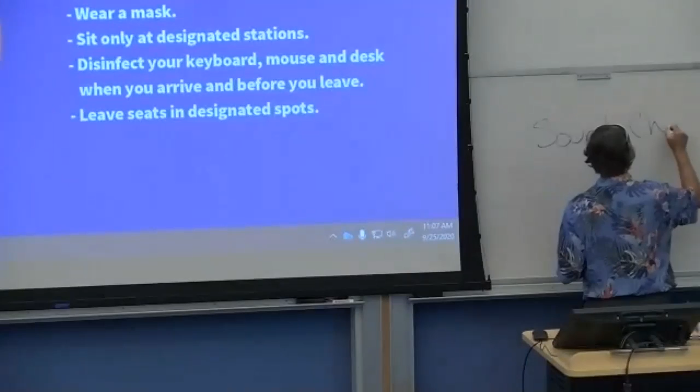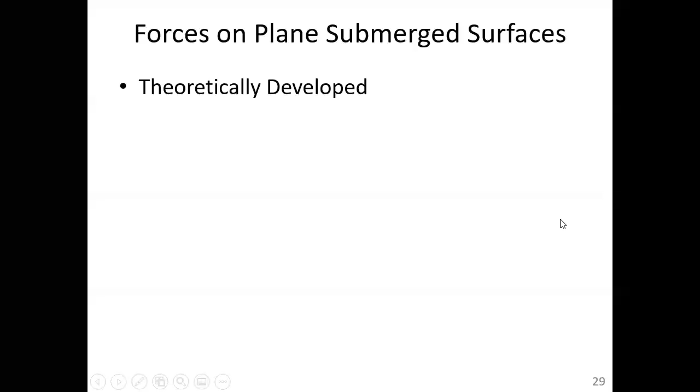So we were talking about forces on plane submerged surfaces. This thing is always in the way. And so we theoretically developed the force on a plane submerged surface. That's pretty straightforward now, and really, after all the differential calculus we did, that's a pretty simple result to do.

All you need to do is find out where the center of area is for your object. Once you know that, you need to find the pressure at that location, multiplied by the area, for the magnitude of force. The more challenging one is figuring out where the force acts. And again, for that, because we're working in X, which is a horizontal surface on a free surface, and Y, which is an inclined axis, since we're working in that plane, we need to have a coordinate XCP, YCP to locate where this force is acting.

And so the force along the y-axis is a fairly straightforward equation. YCP, which is the location from the free surface to the center of pressure, is a sum of the distance along the y-axis to the center of area, plus some term that's a function of two properties of the area, the moment of inertia of the centroid and the area itself. And then the last term is the depth of submergence of the center of area.

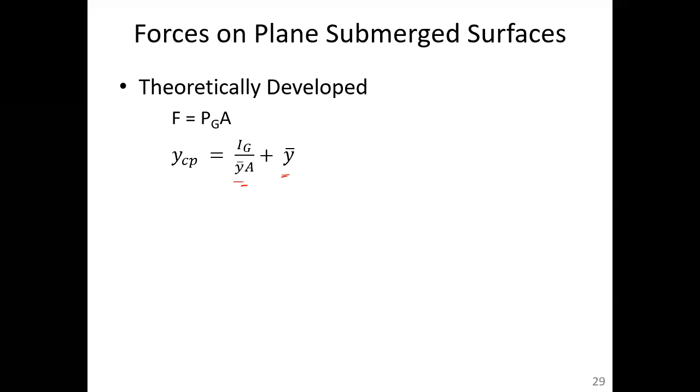And again, in that first term, IG over Y-bar A, the only thing that really changes on a surface is the depth of submergence. So physically what it's saying is, as the depth of submergence of your area gets deeper and deeper, its Y-bar gets larger and larger, the center of pressure is moving towards the center of area.

And then the other direction, if we have a figure through which we can put a y-axis, which happens to be an axis of symmetry, then we know that the center of pressure dimension X will be right along that axis of symmetry. So typically, for example, for a rectangle or a circle, where the axis of symmetry is right down through the center of area in either of these cases, the force is going to act directly below the center of area, YCP. So that's everything we developed.

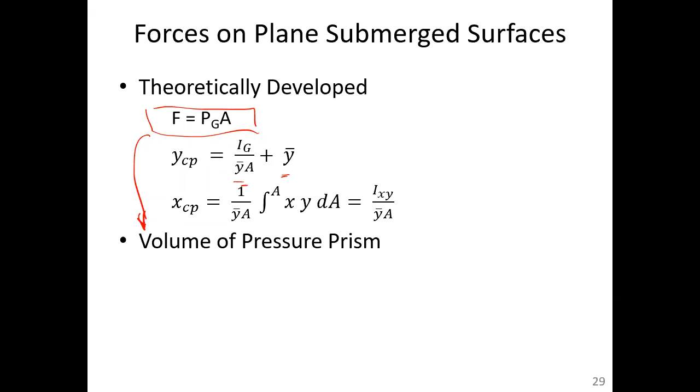And the last thing I might identify is, and I'll show this on another slide, this equation, force equals PGA, is basically another concept. It's just the volume of the pressure prism that sits on the surface. So I'll sketch that on another slide.

And as such, this prism, which is a linearly changing pressure as you move over the surface, the force is going to act through the centroid of the pressure prism, which is XCP and YCP. It's not saying anything different, it's just another way of looking at it.

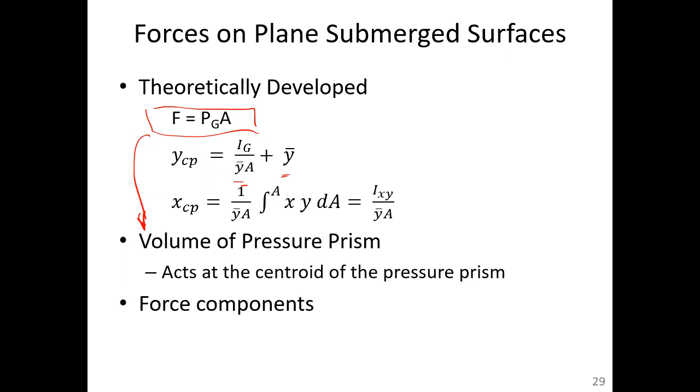And another thing I want to get into today is force components. So obviously, we can put everything into a vertical and horizontal plane, even though we have this inclined surface. That's what I'm going to talk about.

So at the very end of the last class, one thing I stressed is we're going to have these surfaces. We looked first at a vertical bulkhead gate, and first we said it was rails that were holding it in place. The force of the fluid, F, on the surface has to be offset by the resisting forces of the rails on that fluid force. The rails would maybe split that force, so each rail would be applying half of that force, such that the sum of the forces in this horizontal direction are zero.

You could also just hold the gate at the bottom. In this case, I'm pushing in this direction, and I not only have a moment at the bottom, but you need to also have a force resisting the force. This is a static equilibrium system, so it must subscribe to force equilibrium and moment equilibrium. Both of those say that either the sum of the forces in any direction is zero, and the sum of the moments at any point in space is zero. Thinking about just this system, the sum of the moments is zero.

They can't hear me? They said it's fuzzy, it's buzzing. Let's see if I change this. Does that help at all? Does that make the sound any better? How about that, is that any better? Let me know by chat. They said yeah, yes, it's better.

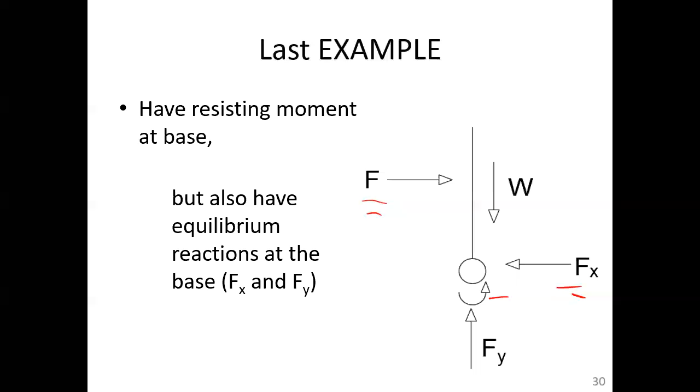So I want to do another example, kind of similar to the example we did last time. Before we had a vertical gate, now we're going to look at an inclined gate. And we're going to ask a lot of different questions, but also expand this into components. So what we're going to have is a system where...

From the free surface down to the top of this 8-foot by 6-foot gate, we have 18 feet along the y-axis. And again, if you want to convert any distance L along the y-axis to either a vertical or a horizontal distance, I've given you those equations. For example, H is equal to L sine theta, which just means that L is equal to H over sine theta. So for example, if we have 18 feet along the inclined axis, the 9 feet is the 18 feet times sine of 30 degrees. Sine of 30 is 0.5, 18 times 0.5 is 9.

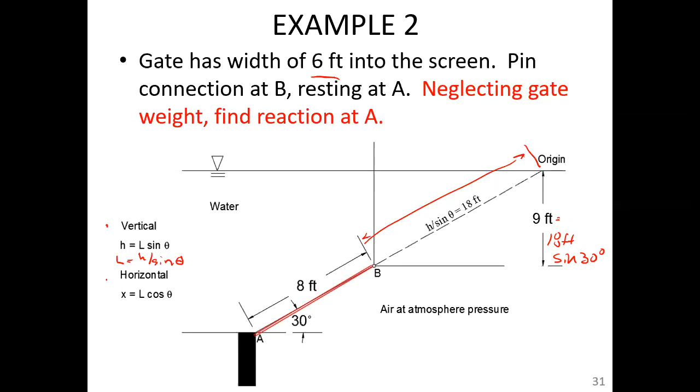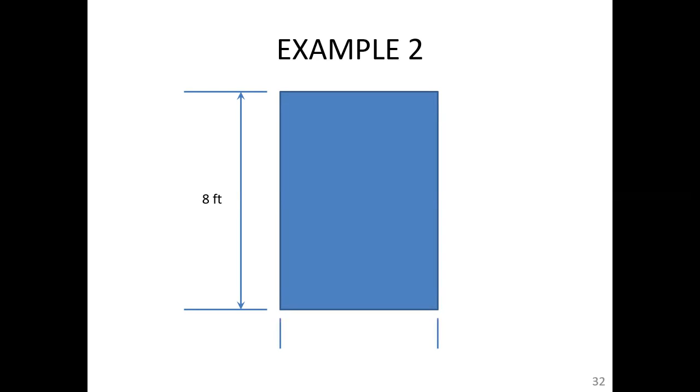So again, we can convert any distance between the h-axis, which is vertical, and the y-axis, which is inclined. And if this is our surface, so all I did was highlight it in red, that's our surface, this is what it looks like. This is the next slide. So again, what this surface looks like, when you look down right on it, it's 8 feet along the inclined axis, it's 6 feet into and out of the board, and it has a center of area, as you would expect, right in the center.

So either go, oops, I can go back, either go 3 feet from either side, or 4 feet from the top.

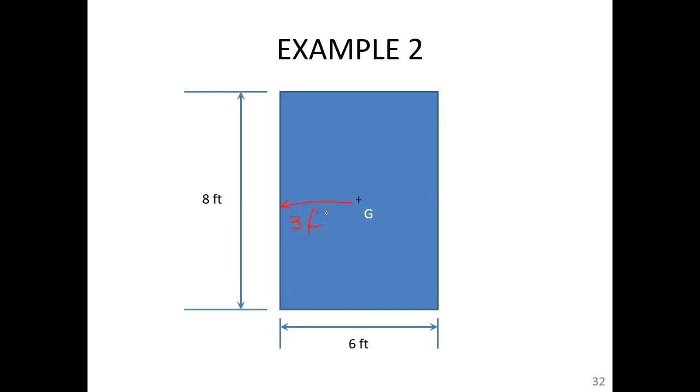So again, that's what the gate looks like. What we're trying to do: if the top of this gate along the y-axis is 18 feet along the y-axis to the free surface, or 9 feet vertically to the free surface, we could calculate the pressure at the very top, and again the pressure at the very bottom.

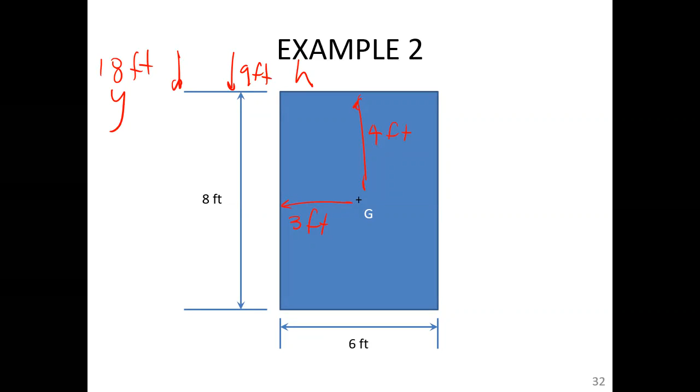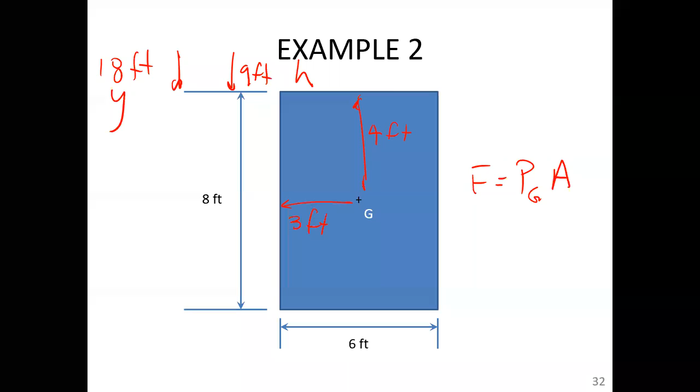But more importantly, remember, all we need to do is calculate the pressure at the center of area. And we know where the center of area is.

And that will give us our force. So this is a plane submerged surface, the gate, with fluid on one side of the surface, which is really common. There are problems, either I'll throw at you or the FE exam will throw at you, where you have different levels of water on each side.

And you just break it into looking at the left side, looking at the right side. The gate and the fluid are static. These are static equilibrium problems, so fluid statics applies. Once we move into fluids moving, fluid statics does not necessarily apply anymore. Sum of the forces is not zero; sum of the forces is mass times acceleration.

That's when we get into momentum in this course. Many of your design problems will be static equilibrium forces. That's why I'm spending all this time. So here are our fluid statics equations.

And again, sum of the forces in any direction for this will be zero. Sum of the moments in any direction are going to be zero, and those moments can be taken anywhere in space. Your real challenge is calculating the moment arm to the point in space you selected.

And again, the wisest thing you can do is always pick a point where one or more forces are acting first, because then their moment arms are zero. They just fall out of the equation. That's really the key to running equilibrium.

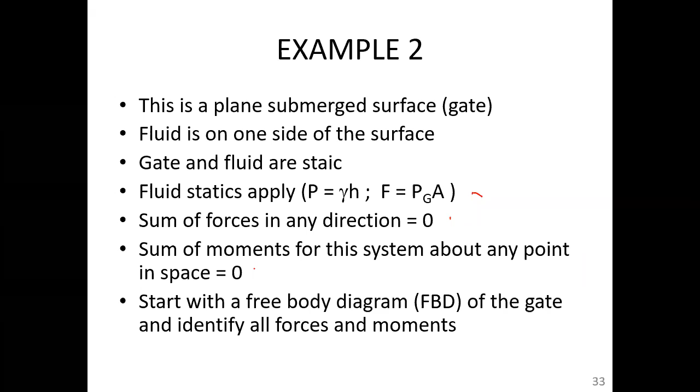So, as I've instructed you before, and I'm doing it again here, when you have a problem given to you like this, the best thing to do is start off with a free body diagram. That really helps you visualize and set up the force or moment equilibrium equations. So in this case, here's the gate between A and B.

And remember, what this problem is after is the reaction force at A. This gate is just resting at A, and there is a reaction force at A. The pressure distribution on one side is what's driving this reaction at A.

However, if this gate had a weight, that would also be complicated. So again, in this problem, you're to assume the gate has no weight. But in many problems, you will see that the gate has weight, and that just is one more force or one more moment you have to deal with.

Recognize that: most problems will either tell you the gate is weightless, or they ignore it, or they will give you the weight of the gate. And typically, if it's a uniform material, that weight is going to act through the center of area of the gate. If it's a non-uniform material, you got to figure out where that weight comes from.

So this is our free body diagram, and we can certainly look at this problem. So we have a pin connection at B.

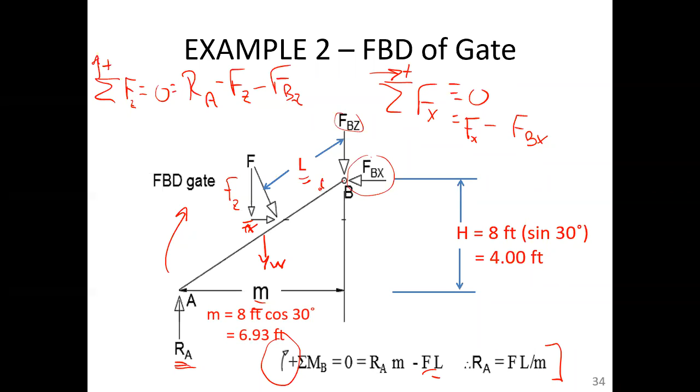So, again, we know that the vertical height of this gate from the inclined axis, its total length is 8 feet, but in the vertical, it would be 4 feet. And likewise, M is going to be 8 foot cosine 30. So remember, this surface is inclined at 30 degrees off the horizontal. So that's where we got that from. That was from the definition that we had in the original slide. This surface is inclined 30 degrees.

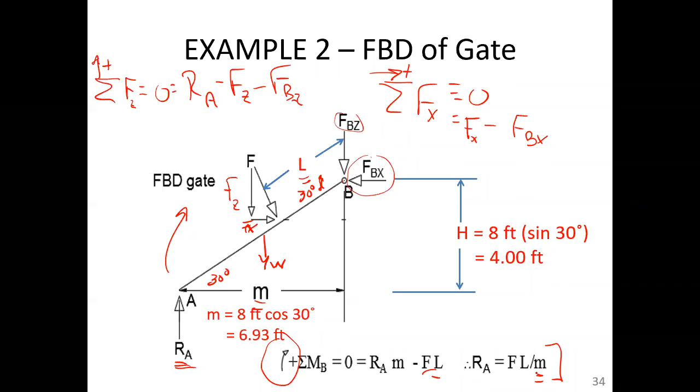So right now, what you know is M in this last equation. F we're going to find from fluid statics. L we're going to find also from fluid statics, both from forces on submerged surfaces.

So at the top of this slide is the same equation we ended with. What we're trying to solve for is RA. The only equilibrium equation in which RA explicitly jumped out at us was not from force equilibrium, but moment equilibrium.

So the fluid force F is from forces on surface. The moment arm L for F is found from the location, YCP. We're going to sketch this for you. And then the moment arm for RA is from the geometry. That was M. So basically, these three bullets are addressing the three terms we have in this equation.

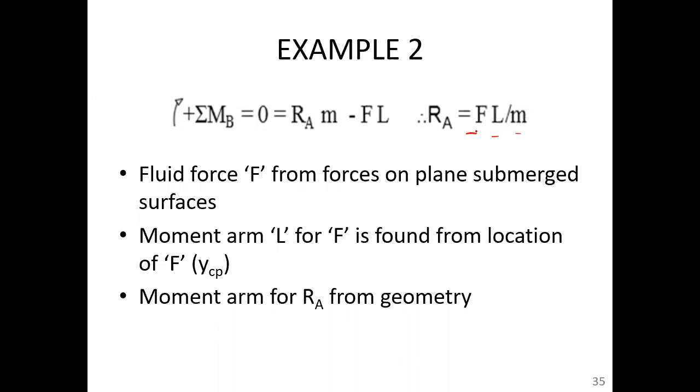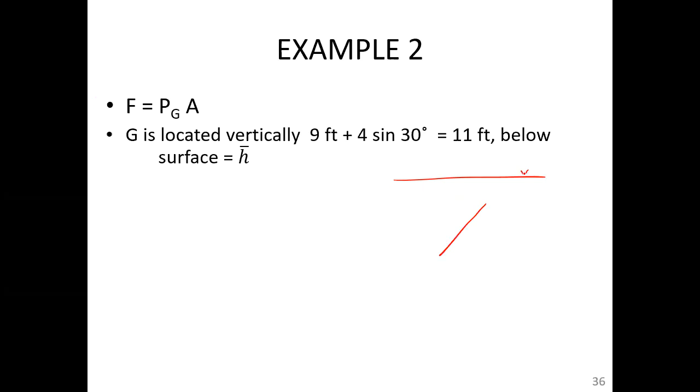If we were looking in the vertical dimension, H bar, the vertical distance from the free surface. So here's our gate, here's the free surface, and your G is here, and this is H bar. H bar is the 9 feet to the top of the gate, plus the four sine theta. So the other way to look at this, again, one is vertically, one is along the y-axis. We developed F is equal to PGA.

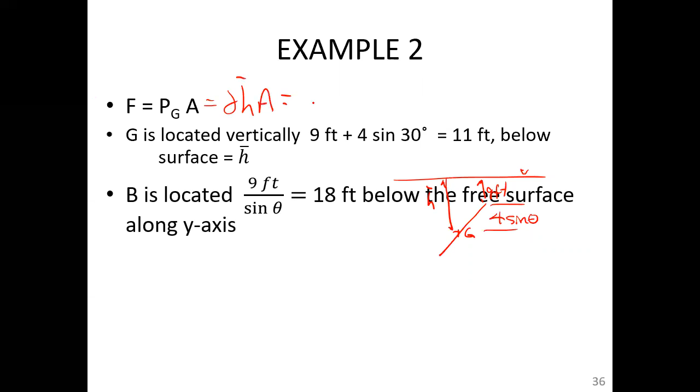By looking along the y-axis, we're going to calculate y bar. I'm just showing you there's a lot of ways of getting the same answer, and you should use whichever method is comfortable for you. You can work in the vertical domain, that's the h-axis, or look in the inclined domain, the y-axis. You will get the same answer. If you don't, you did something wrong.

So B, again, is the point at the top of the gate. So B is here, and it's located 18 feet below the free surface along the y-axis. If the gate is 8 feet long along the y-axis, then y bar is the 18 feet from the free surface to B, plus half of that 8-foot length, 8 foot over 2. That should be equal to... 8 over 2 is 4 feet.

So if you look at the equation at the top, it specifically applies, look it up in the back of the book. We just computed h bar and y bar. Theta we know, and the area we know. The area is 6 foot by 8 foot. So either way we go, we can calculate the force.

Again, h bar is y bar sine theta. We just found that y bar is 22 feet. I'm just showing you a check at the bottom. The second bullet, we showed that h bar is 11 feet. And again, if you worked in the y domain, you can still always go back to the h domain to get the same answer.

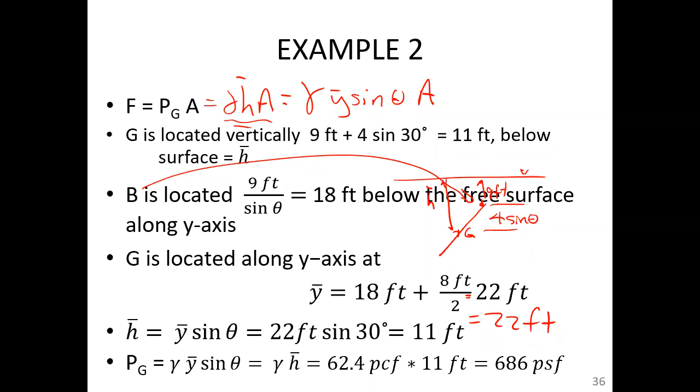So, pressure at the center of area, gamma y bar sine theta, which is gamma h bar, and that's 686 pounds per square foot. That's PG. And then obviously the force on the submerged area is now that pressure times the area, 6 foot times 8 foot.

Squared. If we used instead of the pressure at the center of area, the fundamental equation, F is equal to gamma y bar sine theta A. Here it is expanded out, and we get 32,900 pounds. If you had used the vertical dimension instead, 32,900 pounds.

And remember, this vector is perpendicular to the surface. So the surface is 30 degrees off the horizontal. The vector is going to be 30 degrees off the vertical. We know it's geometry. It's not imaginary. Great.

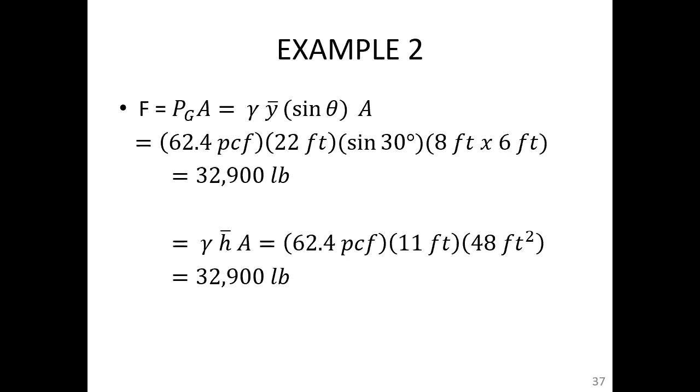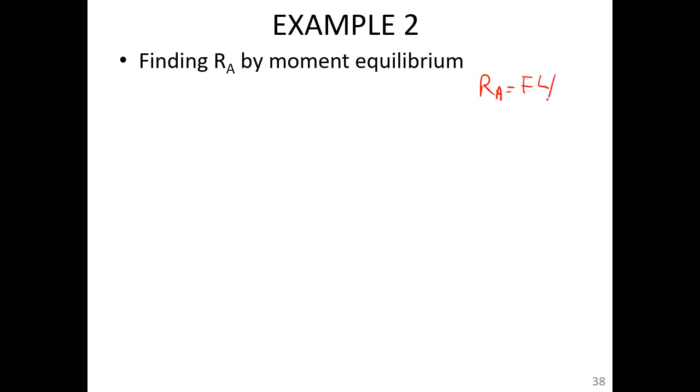So we had this equation where RA, it probably is on this slide, I don't remember everything now. RA is equal to F L over M. That was our equation for moment equilibrium. So here is the system again.

Well, we can calculate YCP to the free surface. That's how the YCP equation was developed. The distance along the y-axis from the center of pressure to the free surface. We know the distance from the free surface to B is 18 feet. So L is YCP minus 18 feet.

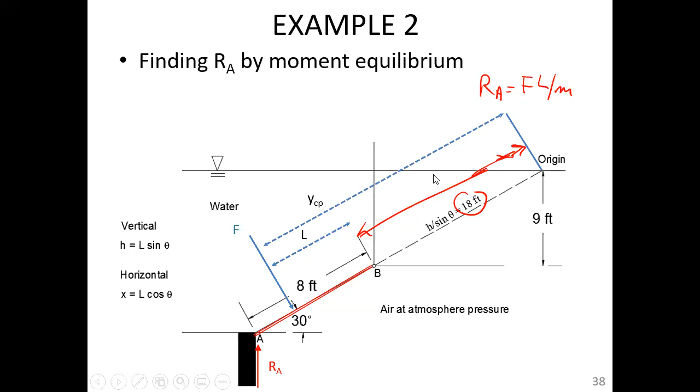Okay. So that's what we just determined, the moment arm. The last piece of the equation, we have F and we have L, just need M, is YCP minus 18 feet, and this is measured along the y-axis.

YCP. This is the equation I started off with today. This is the equation we developed two lectures ago, and we used last lecture. The distance along the y-axis from the center of pressure to the free surface is the moment of inertia centroidally. In this case, we have a rectangle. The moment of inertia of a rectangle is 1/12 bh cubed. In this case, the b in that moment of inertia equation is the dimension into and out of the paper. The h is the dimension along the y-axis. Divided by y bar A, plus y bar. And everything in this equation is done.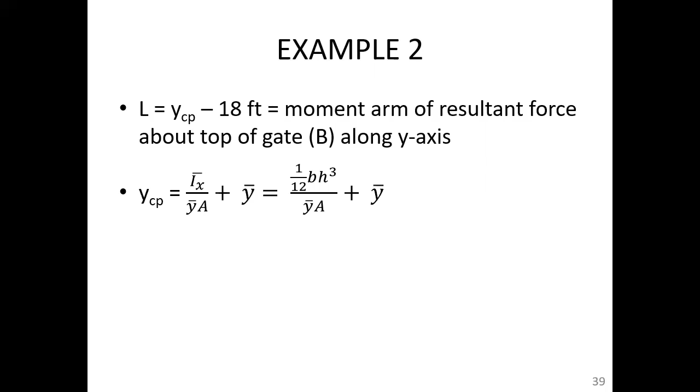So again, in the Ix formula, b is the horizontal dimension into the screen, and in that same formula, h is the vertical dimension. Unfortunately, it's the same word, H is not the same h, but I'm trying to be consistent with what's in your book and use what they have.

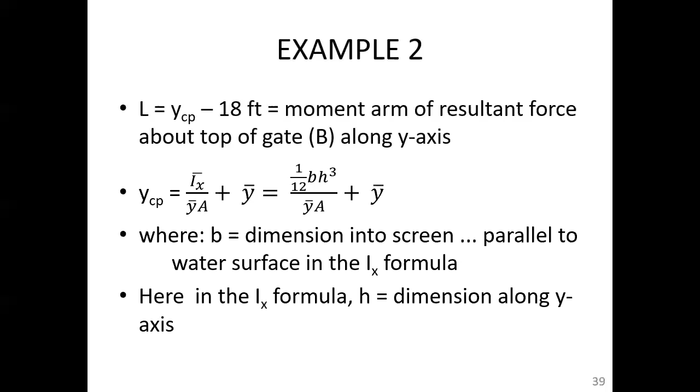So we have everything in that equation to calculate this. B is 6 feet, H is 8 feet, that's cubed, divided by Y bar, which is 22 feet, times 48. Area is 6 foot by 8 foot, or 48 square feet, plus Y bar. So the first term is 0.24 feet, the second term is 22 feet, so YCP is 22.24 feet.

The center of area, Y bar, is at 22 feet. Along the y-axis, YCP is lying below Y bar. Center of pressure is always at or below center of area.

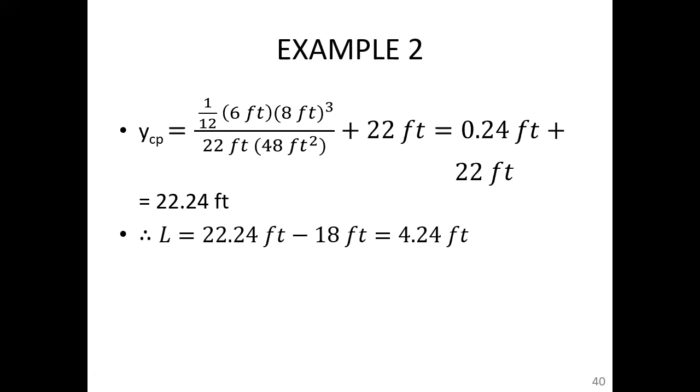So we would subtract off 18 feet, and that would give us the moment arm of the resultant force F, which is the resultant force of the pressure distribution of the fluid on one side of that gate. That moment arm is 4.24 feet.

When we look at the development of the problem, the equation which we had developed from the moment equilibrium was that RA is FL over M. That came from sum of the moments about B equals 0. So we have F, that was 32,900 pounds, whether you went along the H dimension or the Y dimension. We have the moment arm L, 4.24 feet, which again was found by knowing where the center of pressure was.

Whenever you're doing a moment equilibrium and you have to use the force of the fluid on the surface, moment equilibrium dictates that you have to know where that force acts. That force acts at XCP, YCP. You have to use that equation. The moment arm for the resultant force of the fluid on the surface is always somehow related to YCP.

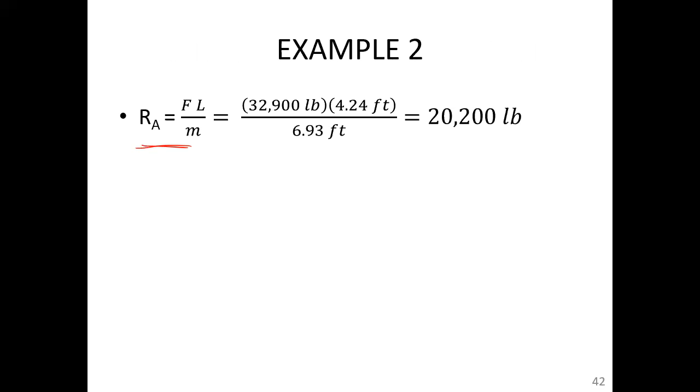And then M, a long time ago we calculated that M was equal to the 8 foot cosine of 30 degrees. Did I not solve that? No, 20,200 pounds. So again, what you have basically is this force was 32,900 pounds. This force is 20,200.

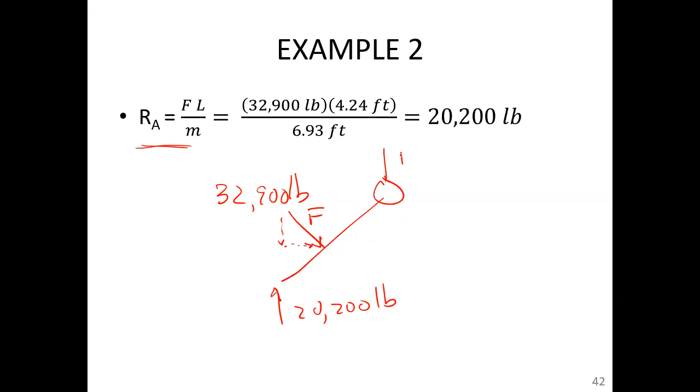Again, you can calculate the X component and the Y component of that force F if you wanted to find FBz and FBx. Ultimately you would, because structurally you need that pin connection to stay in place. Similarly, whatever you're designing down at this location needs to be able to accommodate that force or that stress. Take that force over the area, and it's a stress.

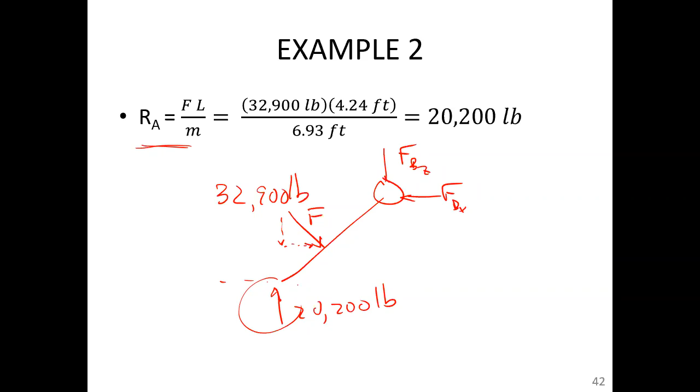From the free surface down to point B at the very top of the gate, 22 feet down to the center of area. But if we put our y-axis right through the center of area, then the product of inertia, Ixy, is 0, and all that says is that the location of that force is right below the center of area along that y-axis, because that y-axis through the center of the area is an axis of symmetry.

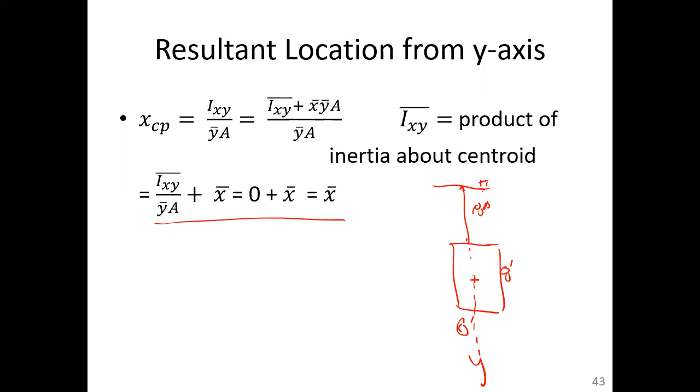Great. So, at the very... are there any questions on that? I can go back to certain slides.

Basically, I'm going to do the same example, but it's a different gate. I want to use different numbers. What I just left you off with was we could calculate the X and Z components of the resultant force on the planes of each surface.

So here we have a gate that's inclined 60 degrees off of the horizontal surface. The free surface is vertically 2 meters above the top, and this gate is 3 meters along the inclined axis and 10 meters into the paper.

So again, the top of the gate is 2 meters below the water surface. And if I go back, this 2 meters is 2.31 meters along the y-axis. And that's what I had in the presentation. Oops, I had a sign error. That should be good.

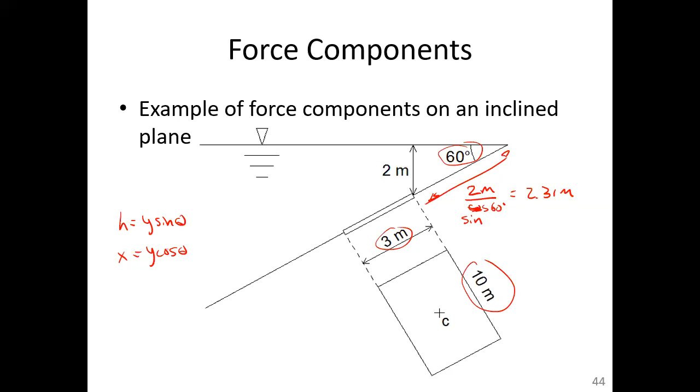No, I'm wrong, sorry. So we can get the geometry of this gate. Remember, the gate itself is 3 meters along the Y, 10 meters into the paper.

If the gate is 3 meters along the y-axis, we have 2.31 meters of free surface to the top of the gate. To get to the center of area, we would add the distance from the free surface down to the top of the gate, plus half of the 3 meters. So the center of area, this is y bar, is 3.81 meters below the free surface, along the y-axis.

The resultant force of the fluid on one side of the surface is F equals gamma y bar sine theta A. In this case, with water, the specific weight is 9,800 newtons per meter cubed, y bar is 3.81 meters, sine of theta is sine of 60 degrees, and A is 3 meters by 10.

So filling it all in, that's what we have. And that means we can calculate that the force of the water on one side of this 3 meter by 10 meter gate is 970,000 newtons. I said 170,000 before, that was wrong.

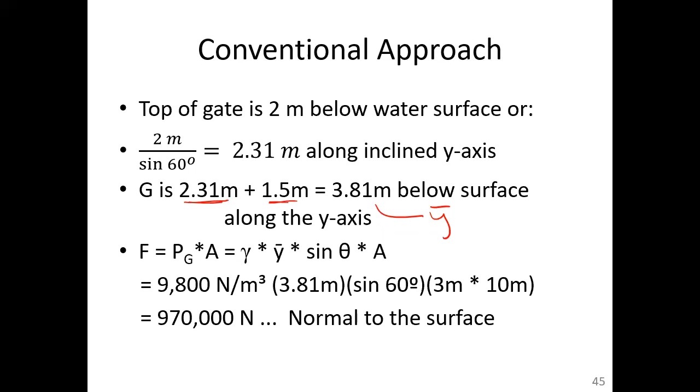That's pretty simple, and the last problem won't labor through all these calculations. But the more you do of these, you can see it's pretty straightforward. You do the geometry first, and then you do the calculations.

So if we look at the resultant force now, it is a force which has... this is our force we just calculated. And we can subdivide it into horizontal and vertical components.

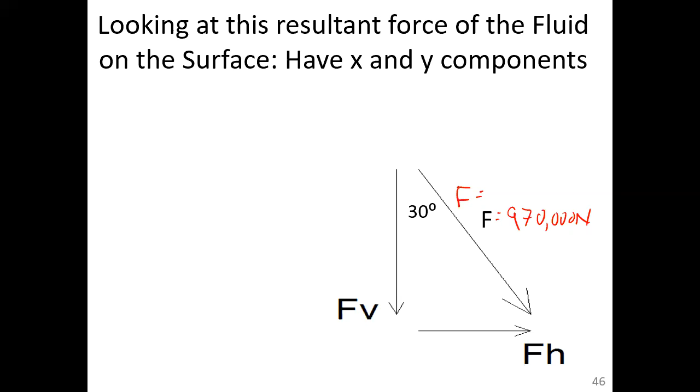To do that, all we need to know is the force triangle. If the axis is 60 degrees off of the horizontal, we can identify the specific geometry off of the vertical. And knowing that, we get a right triangle, from which we can calculate the horizontal and vertical components.

With this right triangle, if the hypotenuse is our resultant force, 970,000 newtons, then the horizontal component is F sine 60. Because of the direction of the total force, it has to have components in these directions, never forget the direction. So the horizontal component is F sine 60, vertical component is F cosine 60. And from the Pythagorean theorem, the magnitude of the resultant vector is the square root of the horizontal squared plus the vertical squared. If you do that, you get 970,000 newtons, as you should.

So all we did was use F equals PGA to get 970,000 newtons, then used the force triangle to calculate the components. In your notes, write these two down: 840,000 horizontal, 485,000 vertical. Because now I want to look at another way of calculating them aside from PGA.

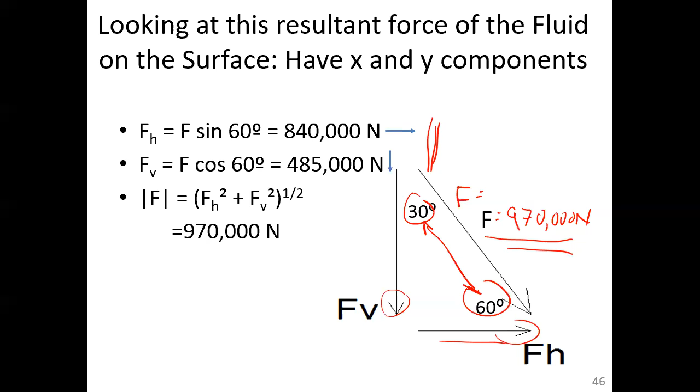Question? Yeah, something's wrong with the geometry, should we keep the 30 degrees at the top for the forces? Sine is opposite... actually these may be reversed. I think you're right, but I think they're reversed. Oh, it's 60 degrees off the horizontal, so it should be 30 degrees off the vertical. Okay, thank you. I've got to make that correction, I hope I remember. So, yeah, switch those two. Thanks for picking that up.

So one way of looking at this result, if this is our surface, basically over this 3 meter by 10 meter surface, 10 meters into the board, what you have is this shape, which is the pressure prism acting over the surface. The pressure at the top is gamma H1, and the pressure at the bottom is gamma H2.

Since it's changing linearly, F equals PGA, where PG is basically the average pressure from the top to the bottom because it's a rectangle. So what you're doing is gamma times H1 plus H2 over 2, times A. If you look at all of these terms, H1 plus H2 over 2 times A is the volume, so gamma times that volume is basically the volume this pressure prism occupies. Fundamentally, the force is equal to the volume of the pressure prism.

This makes it a bit easier to comprehend. Over any submerged surface, there's a pressure distribution, that's what I'm calling the pressure prism. And if you can calculate the volume of that pressure prism, you basically have the force. Just another way of looking at it.

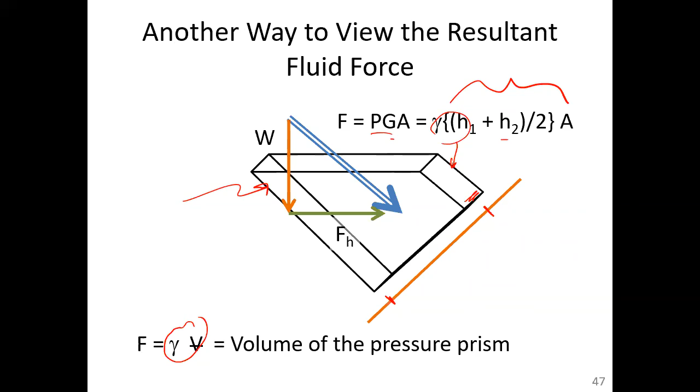So what I'd like to do is break the resultant force into components and actually start off by calculating the components first. Before, we would calculate the total force F equals PGA, then break it into components. Now I want to calculate the components first, and then come up with the total force. It's the same problem, just to show you get the same answer, but more importantly, there will be some problems where you only care about the horizontal and vertical component.

And that's what you need to know. When we get to the end of this fluid statics business, we're going to look at forces on curved submerged surfaces.

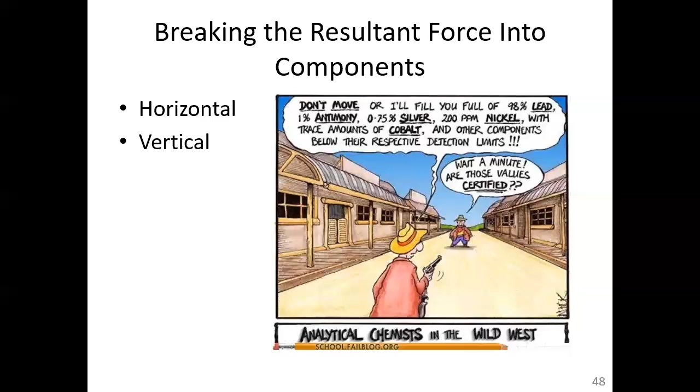That's when we're going to need to know components as well. So, if we look at this...

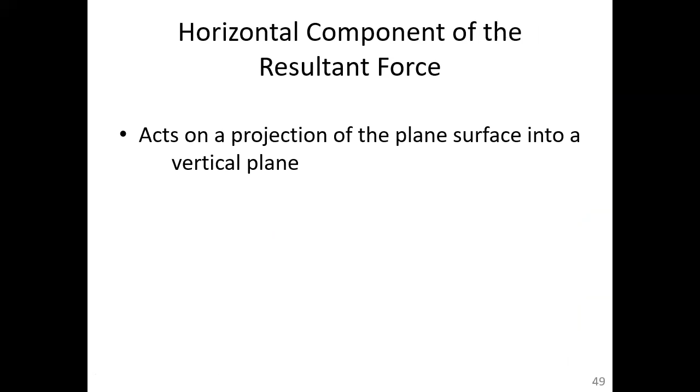The horizontal component of the resultant force is acting on a projection of that inclined surface into a vertical plane. Now I'm going to sketch that. So, to project our inclined surface into a vertical plane...

This was our inclined surface. It was inclined at 60 degrees. It's a 3 meter by 10 meter gate. And if I just draw dashed lines, and this is a vertical plane, all I'm doing is think of this as shining a flashlight onto that surface, and you're looking at the shadow on the wall.

The wall is a vertical plane. So if you have a rectangle on an inclined surface and you shine a shadow on it, it's a rectangle on the wall, it just doesn't have the same dimensions anymore. Its dimensions are the vertical dimension, which is changed, by the horizontal, which is unchanged. So whereas the real inclined surface is 3 meters by 10 meters, when I project it into a vertical plane, it's a rectangle that's 2.6 meters high by 10 meters, okay?

And now what's happening is, if you think about it, from the vertical surface we have a pressure distribution, and that pressure distribution is changing linearly over the surface. This is the pressure distribution of the horizontal projection. Let's call that AH, the horizontal projection of the area.

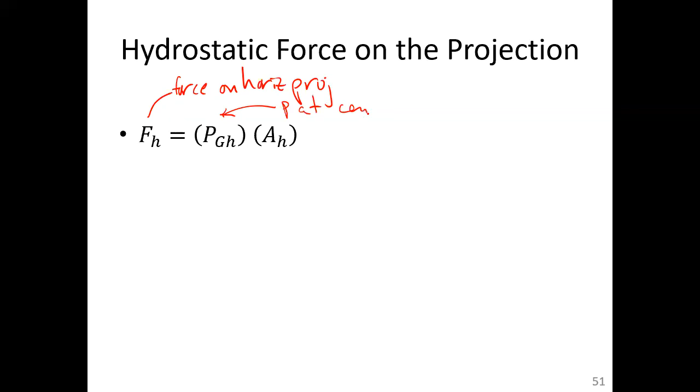...is equal to the pressure at the center of area, remember that projected area is 2.6 meters high. So again, it's a rectangle, and we know exactly where the centroid should be for the horizontal projection.

Same equation, it's just that we're looking at the projection. So the distance vertically, because we're looking in a vertical projected plane, the distance vertically to the top of the gate is 2 meters. The distance to the center of area, if the gate at 3 meters projects into the vertical as 2.6 meters...

...then the center of area is the 2 meters down from the free surface to the top of the gate, plus half of the length in the vertical, 2.6 meters over 2, to get to the center of area. So this is getting us h bar, a vertical distance down to the center of area. When I multiply this by the specific weight, gamma h bar is PGH.

That's the pressure acting at the center of this horizontal projection. And then we're multiplying that by the area. Again, in the projected sense, it's 2.6 meters high by 10 meters forward. What do you get? 840,000 newtons.

That's the exact same number we got when we looked at the force triangle, right? Coincidence? So again, this is another way, and this is what we're going to have to do for curved surfaces. Okay, does everybody understand this? It's really not that complex of a concept, but I've been doing this for so long, maybe it seems that way.

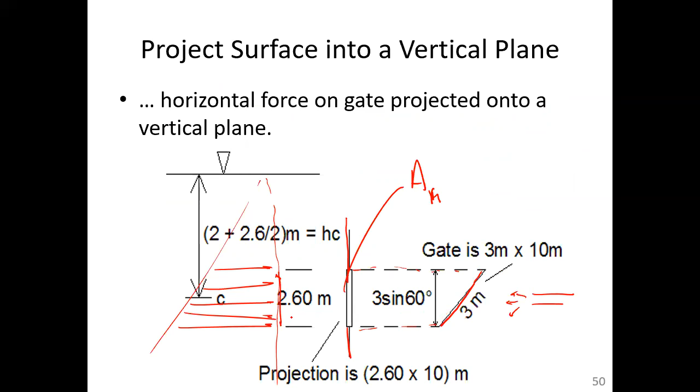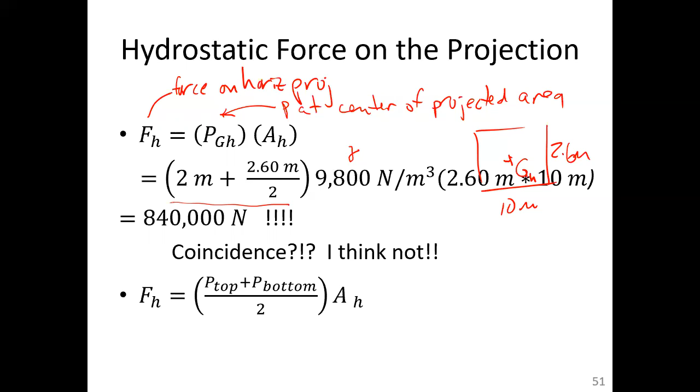Another way of looking at this is, because you have a linear pressure distribution changing over this horizontal projection, you can just average the pressure at the top, gamma times 2 meters, plus the pressure at the bottom, gamma times 4.6 meters, average that pressure, and you get the same number, 840,000.

So we have the horizontal component. Now we want to look at the vertical component. And again, think of the surface itself, we just want to think of the pressure distribution. Remember, pressure is a scalar, it acts the same in all directions. So all we're going to do is reorient the pressure distribution to be acting vertically on the surface.

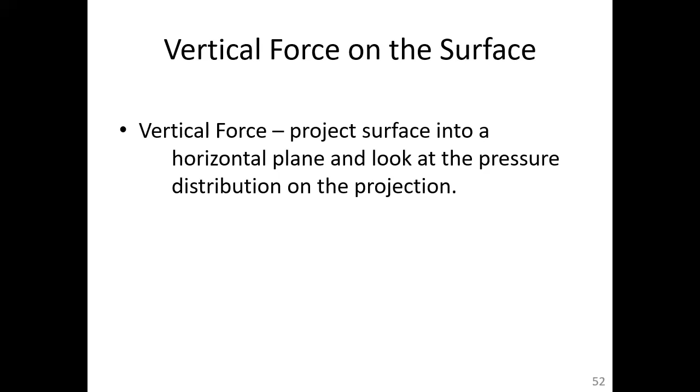Okay, so this is our real system. This is the inclined surface.

H1 we've identified is 2 meters. H2 is 4.6 meters. We've already done these calculations. If this is our real inclined surface, I'm just rotating it horizontally. It's not horizontal, but that's all I did was rotate it. So again, we've got gamma H1 to gamma H2.

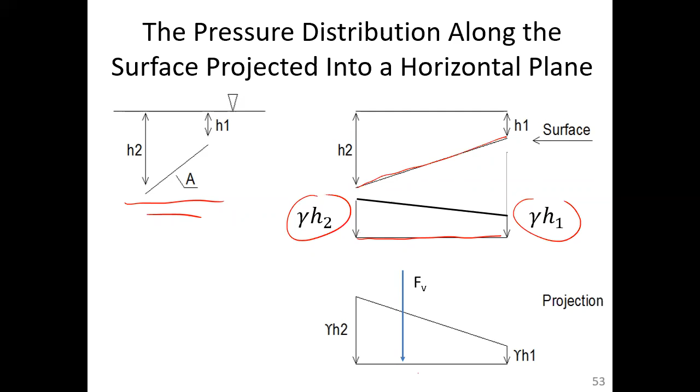So basically what's happening is you have a linearly changing pressure distribution acting vertically on the surface. This is going to have a dimension in x by 10 meters into and out of the paper, with a linear change in pressure distribution. So we can calculate this vertical force just by looking at the average pressure over the area, same thing as we did in the horizontal case.

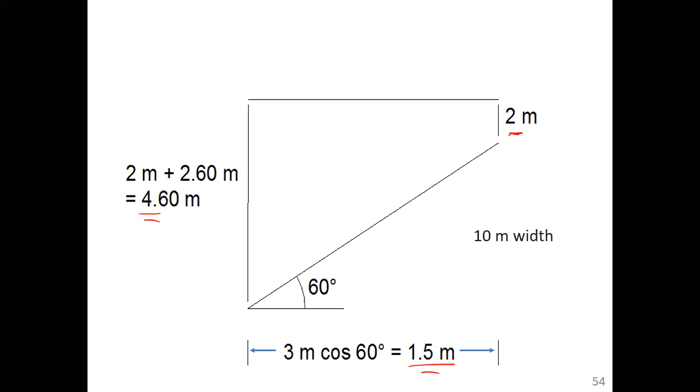Going from one side to the other, we've got a depth of submergence at the top end of the surface of 2 meters, and a depth of submergence at the bottom of 4.6 meters. If we projected this into a horizontal plane, because we're looking at pressure being perpendicular to the projection, we have an area of 1.5 meters by 10 meter width. So here we have the average pressure, and that's our PG, the pressure in the center area of this horizontally considered surface, which has a horizontal distance of 1.5 meters, 10 meters. When you do the calculation, 485,000, the same thing we found before.

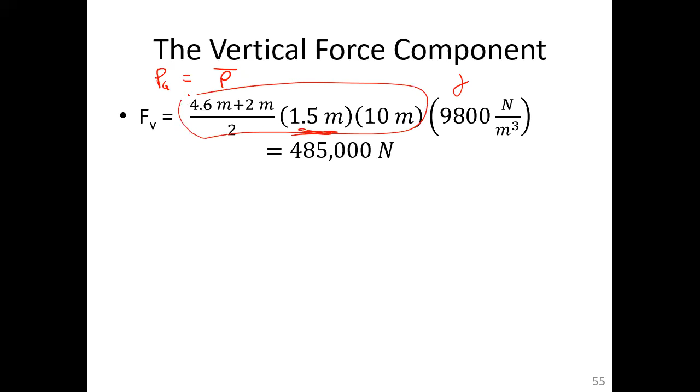So that may look a little abstract, so I want to make it even easier for you. If you look at what we did here: 4.6 meters is physically the depth of water above the bottom of the surface, 2 meters is physically the depth of water above the top. 4.6 meters plus 2 meters, over 2, times the area is physically the volume of water above the surface. So the vertical force is the weight of water above the surface, which makes a lot of sense, doesn't it?

That's all you really have to do. We had an earlier homework problem where we were trying to calculate the volume in a trough, and the volume is equal to, in that case, the weight divided by the specific weight. But basically weight is equal to specific weight times volume. So for the vertical component of the force, you're just calculating the weight of the fluid above the surface.

Question: what's the difference in labeling volume like that, the upside down A versus the gradient?

I try to do it to distinguish all the different V's we're going to see in this course. So for volumes, I usually put a line through it because there are a lot of V's in this course. Velocity will be one of the big ones coming up.